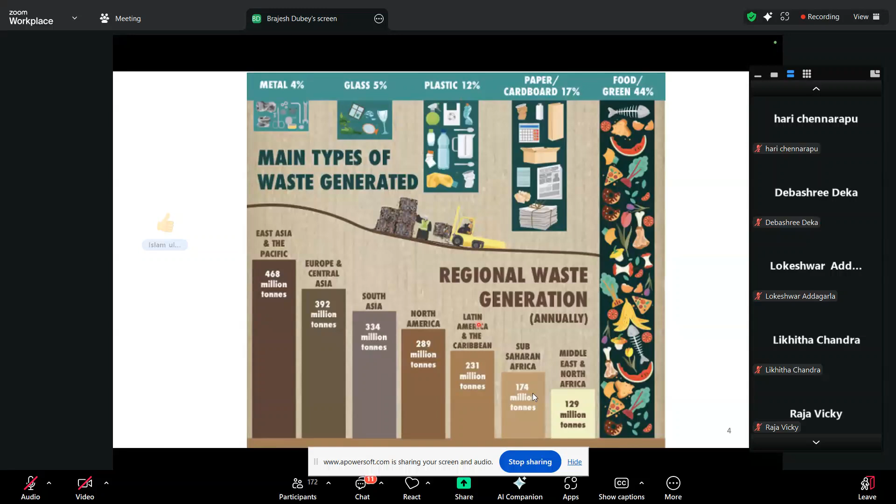What is happening today is, in many parts of the world, we are mixing the waste together. When we mix the waste, it's very difficult to do anything with it other than putting it in a sanitary landfill. Last year's report, which had slightly older data, is also suggesting that the world has to move beyond the waste era. This is the UNEP report on beyond an age of waste, turning rubbish into resource.

Projections show that we are doing lots of open dumping and burning of waste, mostly open burning, which is causing increased pollution. There's an urgent need where waste generation from economic growth has to shift towards zero waste and more circularity. Although we keep talking about circularity for several years, unfortunately this past year our circularity percentage has gone down - earlier it was around 9%, now we are down to around 7% globally.

So we need action. We are seeing lots of inaction in the global waste management area or resource management area, and that is impacting human health, economics, and environment. It can lead to almost $600 billion surpassing in cost for improper waste management by 2050. So we have to do better.

In terms of how we manage solid waste very simply, it could be a centralized approach or decentralized approach, and AI, IoT, ML and other things could be useful in both sectors. We generate the waste, store it somewhere, collect it, transfer and transport, process it, and dispose it. Centralized could mean a big plant - it all depends on economy of scale. For waste to energy and others, you need a certain size of plant, especially incineration plants.

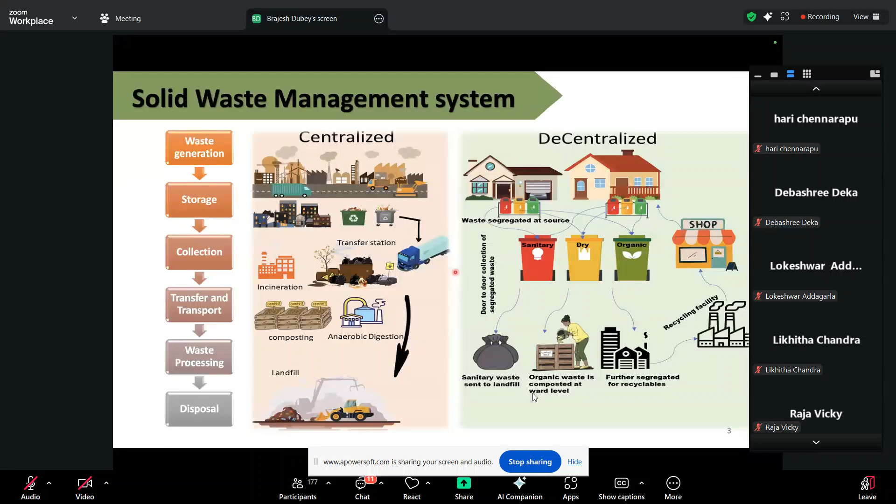The decentralized approach is similar - you can take a few wards or part of the city and have a compost plant there, or a biomethanation plant. Depending on the situation, it all has to work economically, and that's very, very important. If the economics doesn't work, things are problematic.

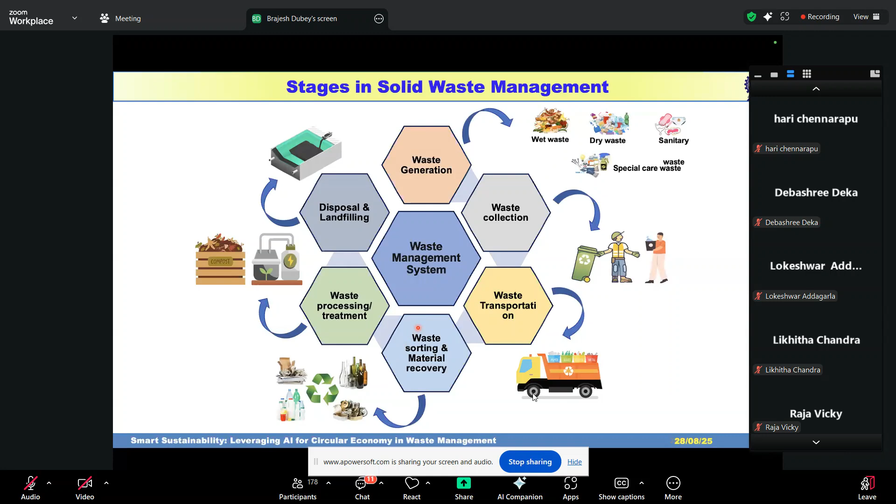As I said earlier, waste generation includes dry waste, sanitary pad waste, and special care waste, which has to be collected, transported, sorted, processed, treated, and disposed. So this is basically the big picture of the different stages in solid waste management. As I said earlier, if you really want effective waste disposal, segregation is the key.

Some of you may have seen this slide earlier as well. I wrote this piece almost 7 years ago, and unfortunately we are still doing very poorly in terms of segregation, not only in India but in many places in the world. So unless we do segregation, we'll look at how AI and IoT can help.

The other phrase in the title was circular economy. By this time most of us have some idea about it. Circular economy is nothing but trying to reuse the waste, trying not to produce waste, because waste is actually also a resource as long as you have the technology to make it a resource.

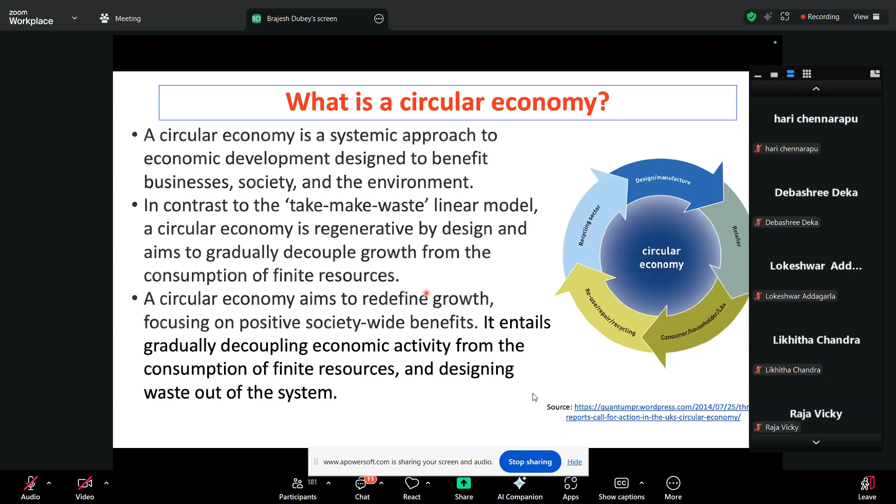Rather than a linear waste model, you try to design regenerative by design, decouple growth from the consumption of finite resources, and while doing that also look at how it positively affects society. At the end of the day, because we have finite resources, we have to make better use of them and try to design the waste out of the system.

As I said, circular economy—right now, only 9% of the world's economy is circular, which was the previous data. The latest data says it's down to 7%. The way we live, we need 1.8 Earths. Unfortunately, we have only one Earth.

Of course, we are trying to go to Mars, but the way we are living on this planet Earth, I don't think we deserve to go to Mars. If you disagree, we can debate that during the Q&A. But I don't think we really deserve to go to any other planet unless we fix the mess on this planet first.

We are using 80% more of the Earth's resources than it can give us. So circular economy says we should extend the life cycle of products through sharing, leasing, reusing, repairing, refurbishing, and recycling, and try to make better use of the resources available to us.

So how can digitalization and Industry 4.0 work in circular economy, and which are the tools? Leveraging artificial intelligence is one part of it, but there are other tools available too—AI and ML, Internet of Things. I'll explain a bit more in the next slide, since this webinar is attended by a variety of people. Then there's blockchain technology and smart manufacturing.

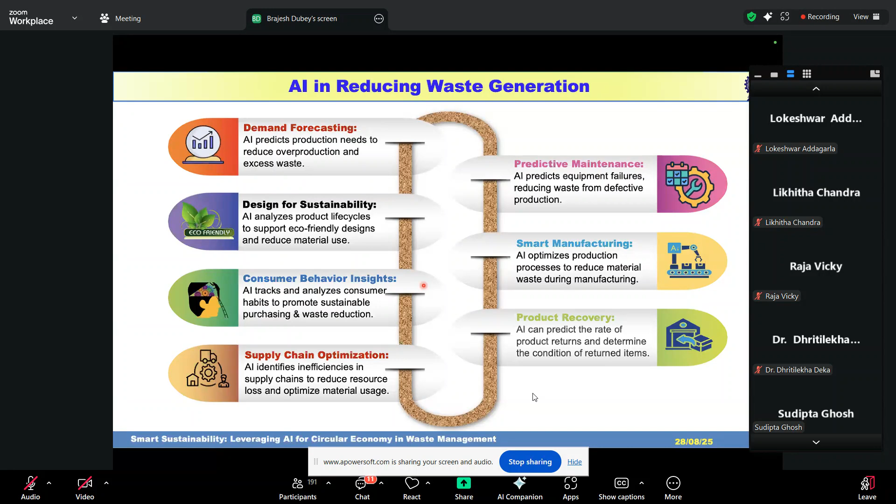In terms of predicting waste generation, it can give us the waste volume using demographic data, seasonal data, and behavioral data. As you can see, unless you have good data, the forecast will not be good. This helps allocate collection resources efficiently.

You can have smart waste bins, which is already used in many places in the world. Sensors in the bins tell you the status, which can help in terms of the collection network. It can analyze this data to schedule pickups only when the bins are near capacity - on demand collection.

You can have smart route optimization. You can use machine learning algorithms which look at historical data, traffic patterns, waste levels, to reduce fuel consumption, operational cost, as well as carbon emissions.

Real-time AI can adjust collection schedules based on traffic patterns, like Google Maps sometimes tells you to take an alternate route. It also considers weather forecasts and holidays, minimizing missed collections and optimizing fleet utilization. Those trucks are quite expensive, especially the well-equipped ones, so this helps a lot.

It can help in material sorting and material recovery stages as well. Deep learning models can classify material through image recognition, enhance processing by sorting hazardous versus recyclable items, and distinguish between different plastic polymers. We already talked about automated waste sorting - you can sort materials like plastic, metal, and paper using robotic arms equipped with AI.

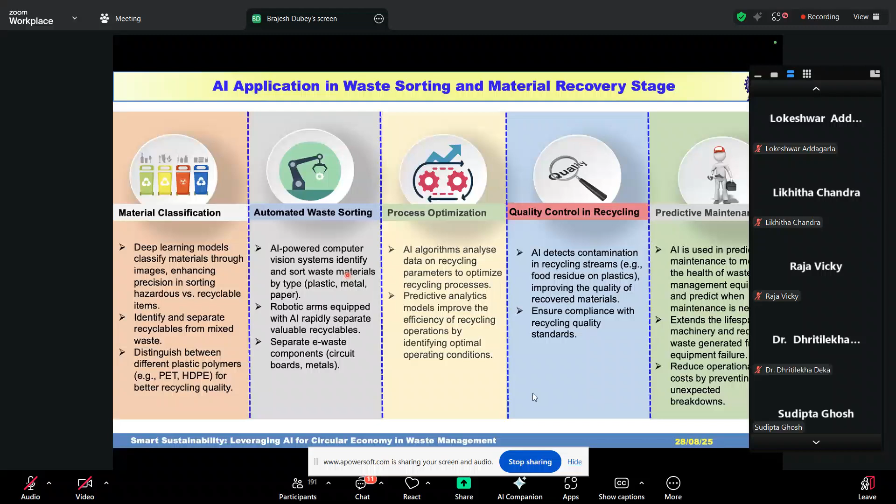AI is used in predictive maintenance as well, extending the lifespan and reducing the cost. So as you can see, these things can really help in achieving circularity.

If you look at some specific applications of AI tools in organic waste treatment options - throughout the world we want source segregation, predominantly wet and dry. Wet is essentially our organic waste. With organic waste, you can do anaerobic digestion, fermentation, composting, hydrothermal carbonization, pyrolysis, or gasification. So a variety of options could be there.

Organic waste typically makes up 40 to 60% in something like Indian conditions. There are different thermochemical and biochemical processes. What happens is we have inconsistent source segregation - inorganic waste leads to contamination, and if you have contamination, compost quality is hampered. Manual monitoring of organic waste is slow, and manual data collection is often incomplete and inaccurate.

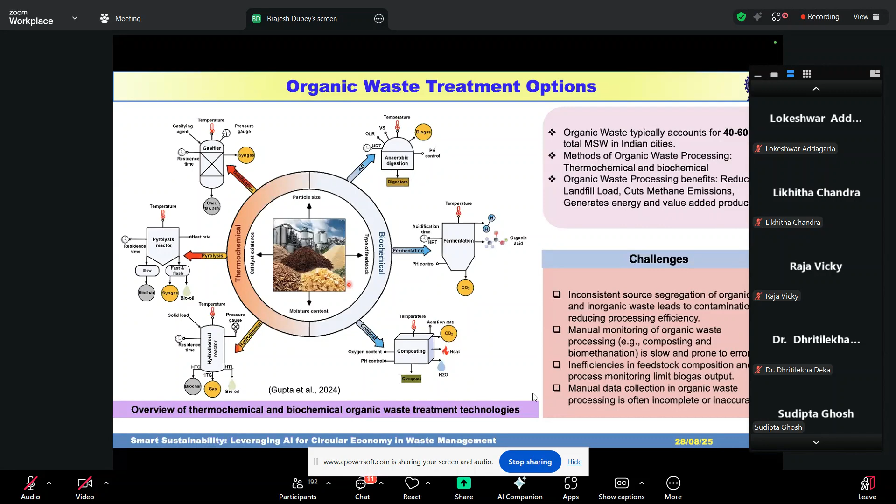So what we can do for organic waste is have smart waste classification and sorting. We can look at contamination in the organic waste, reduce it, and improve it - this will improve compost and biogas quality. We can also look at the composition as well.

If AI can analyze my organic waste composition, it can tell me whether I should go for composting or biogas. It can also tell me whether I should go for a pre-treatment step, and how much pre-treatment is required.

That will really help. Real-time feedback could be done to enhance the quality of the process, for real-time process monitoring of the organic waste decomposition process. IoT sensors could look at temperature, moisture, pH, and all that. You can even predict how much gas, oil, and char yield will be produced in terms of the thermochemical process, predicting biogas yield and process stability. If we design it properly, these tools could be helpful in making organic waste treatment more effective.

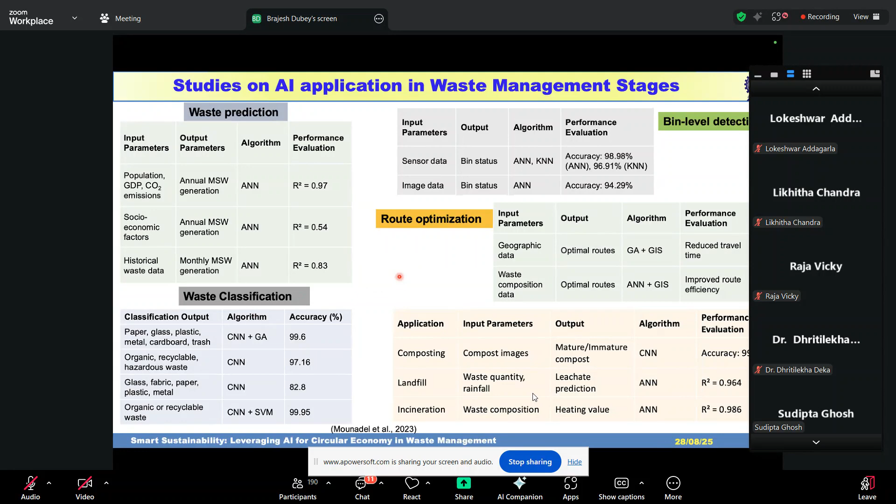People are already working on this. You can see some of these papers which I've cited here. This is a review paper that looked at a variety of papers on waste prediction, mostly using ANN, as well as route optimization, bin level detection, and waste classification. Applications have been demonstrated through some pilots and other projects, and there are plants that have already started using these tools.

For example, Barcelona has a smart waste management system. There are other places too, I just picked a few examples to illustrate this point, but there could be many examples out there. I've seen similar systems in the Netherlands and other Western European countries myself. They use sensors installed in waste bins that monitor the fill level and communicate with the waste collection truck, helping achieve better collection routes based on real-time data. In Seoul, South Korea, they have this.

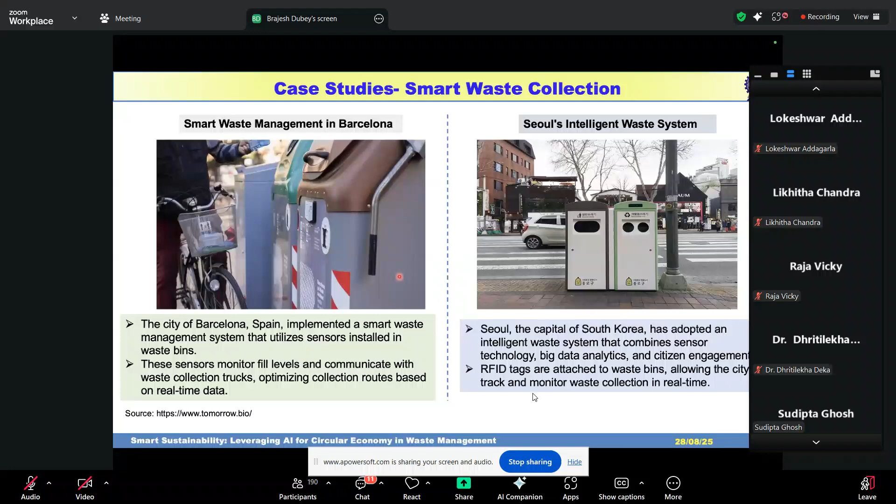Intelligent waste management system that combines sensor technology, big data analytics, as well as citizen engagement. RFID tags are attached to the waste bins, allowing the city to track and monitor waste collection in real time. Then there's a sorting case study happening in Virginia.

One recycling center in Virginia installed AMP technology - AMP's AI platform, AMP Neuron, which uses cameras to scan mixed waste and identify different materials. By installing that, they actually improved their recycled material recovery by 10%. So it's not just fancy technology, it has real application on the ground too. The neuron's deep learning capability allows for continuous improvement.

But one thing you need is at least wet and dry segregation. You need to have recyclables collected separately. Source segregation cannot be replaced - even with AI and all that, you will have to do source segregation, which is actually one of the bottlenecks in a country like India. But we have to do that. Only then will these things work.

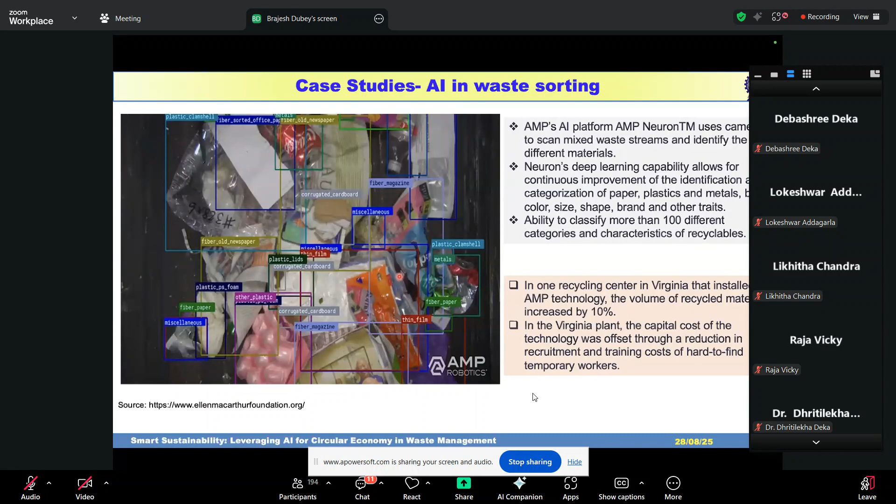So you can categorize for paper, plastic, metals, different colors, different sizes, different shapes, sometimes even brands - with the ability to classify more than 100 different categories. So that's the case study happening in Virginia.

Similarly, there's another one in Solon, Ohio, operated by AMP Robotics Corporation. They use AMP jet technologies with pneumatic ejectors, computer vision, and AI cameras that look at color, texture, and logos. Machine learning algorithms process over 150 billion objects. Annual capacity is 50,000 tons of waste, at 18 tons per hour, with a sorting efficiency of more than 90% recovery rate for targeted recyclables.

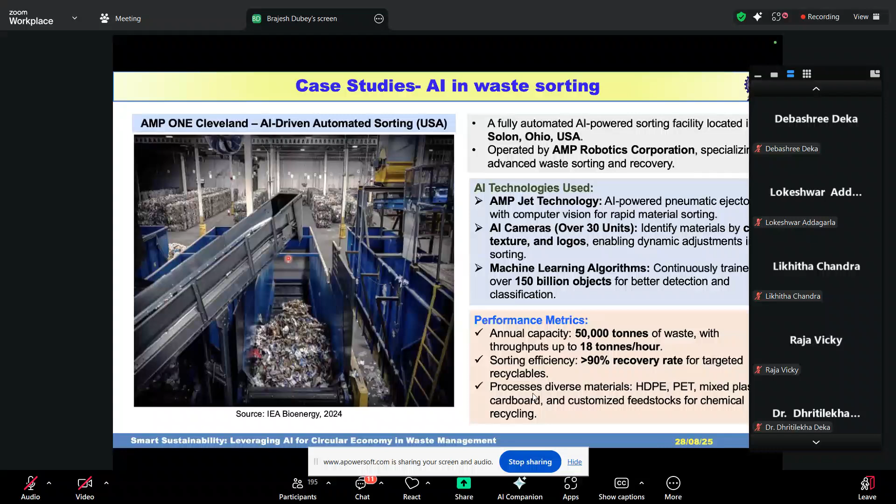It does help. Initially these systems are costly, of course, and the return on investment may be slightly longer, but if you think from a life cycle cost perspective - many times in industry we think only in short term costs, but if you think of life cycle cost and better resource efficiency, these things do help globally. Of course, these also need to be supported by some sort of incentives, I don't want to call them subsidies, for companies to come forward, because they are a bit costly to start with.

In Sweden, they have state of the art plastic sorting plants using NIR sensors, deep learning cameras, laser object detection, and digital processes. Here also they achieve a purity level of more than 90% for the mono-plastic fractions.

Sorting efficiency is up to 95%. So these things are being used, and they do help in terms of bringing circularity.

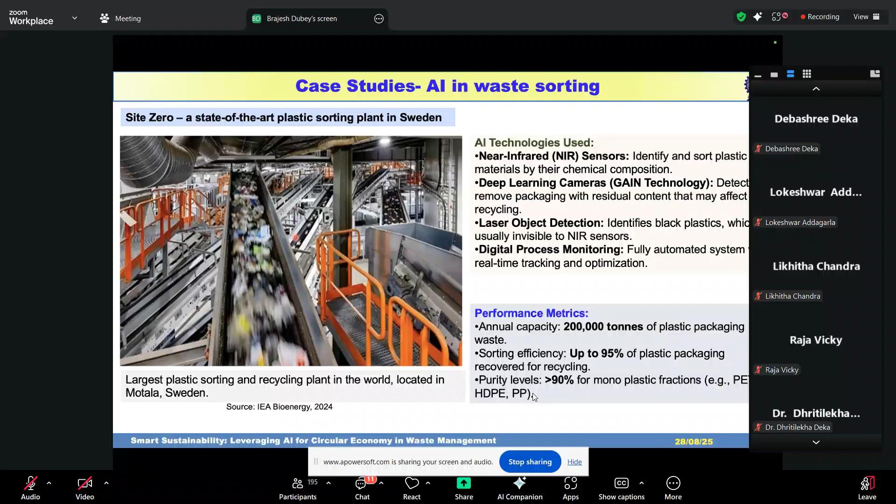For example, many cities in India have given people two bins for wet and dry waste, but the truck still does not have compartments. So if the truck does not have compartments, they mix it together in one truck. The separate truck doesn't come, so people lose the incentive to do source segregation at home. So inefficient waste segregation at source and poor waste processing facilities—those things have to be worked on.

So when we talk about all these AI and other tools, one thing I'd say is, think about it like making a comparison with a pizza—we all love pizza, most of us, especially since this is being hosted from Chicago, and that Chicago deep dish pizza I really enjoyed with Professor Reddy when I was there. So in terms of pizza, you look at it: it has your base, then cheese, then some toppings, and you add seasonings on top.

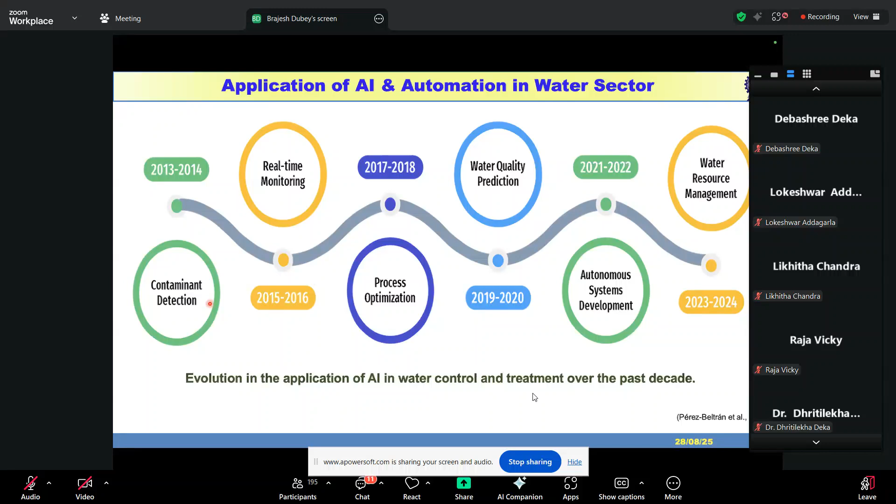In fact, even for flood protection, Singapore is using a smart water grid. Of course, Singapore is known for its advanced water management practices. Now they are using an AI powered smart water grid that utilizes sensors and AI algorithms to monitor real time water quality. Singapore takes wastewater, treats it, and the treated wastewater is taken to the drinking water plant and used as NEWater. So they have been doing circularity in water for many years now. The system promptly identifies any anomaly or potential contamination so you can intervene, enabling rapid response to water quality issues and ensuring safe drinking water is supplied.

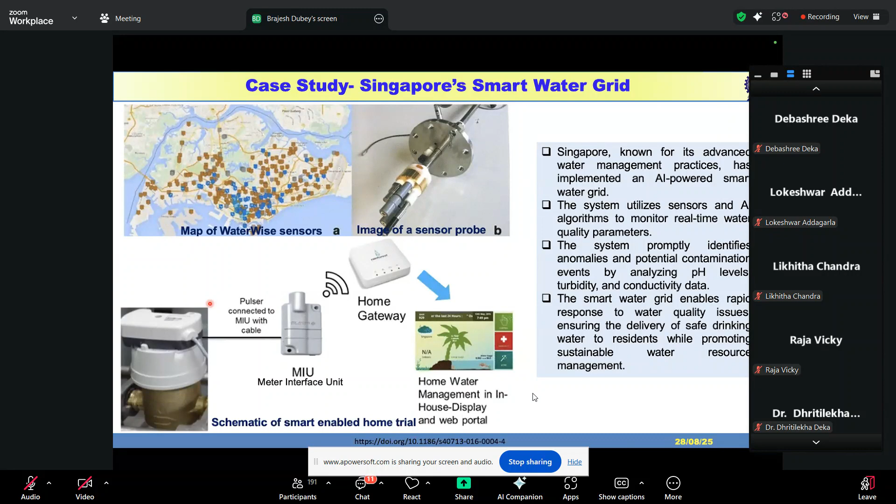And if you can do that, trust builds between the consumer and the supplier, so we don't need all those RO units that we install at home. All these RO units we install at home are, as an environmental engineer, kind of a waste. Although I have an RO in my home at IIT Kharagpur campus, I feel like it's a waste because of the amount of water we waste and all that.

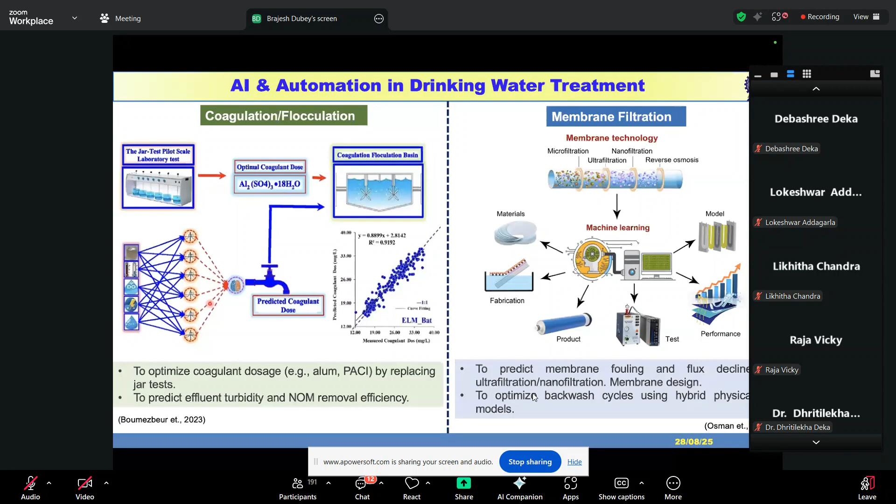In terms of optimized coagulant dose, replacing jar tests, turbidity, and natural organic matter removal efficiency, you can use machine learning for membrane fouling as well. So these things are being used in other sectors of environmental engineering too. In fact, predicting heavy metal removal, modeling equilibrium adsorption processes, disinfection processes—all these things are being done.

So when we talk about this AI, what are the challenges? We talked about the challenges for waste management in terms of data, but in general, if you talk about civil engineering applications, AI could be used in other civil engineering applications as well. There's a need for civil engineers to be proficient in data science and AI concepts, so the way we teach civil engineers also needs to actually look at this.

We have to talk about high initial investment, cost of software and hardware. But when I talk about this civil engineering curriculum, I don't want our basic courses to go away, because those basic courses are needed—that's the pizza example again. All those basic courses, your electives, and then you can have your AI courses there. Because unless you are a good civil engineer, just having knowledge of AI is not going to help you.

But in today's world, you have to learn all this stuff as well, because this is how the entire global industry is moving. So we should be aware as civil engineers about the different technologies out there and how to use them in civil engineering applications. And we can use it in civil engineering applications when we know civil engineering—we have to really be good at basic civil engineering as well.

So data quality matters—AI models are only as good as the data they are trained on. Then of course there's data privacy and cybersecurity risk. There is always cultural resistance, overcoming traditional practice within the industry. There's regulatory liability—who is responsible if the AI-designed structure falls? And then of course the skill gap which I talked to you about.

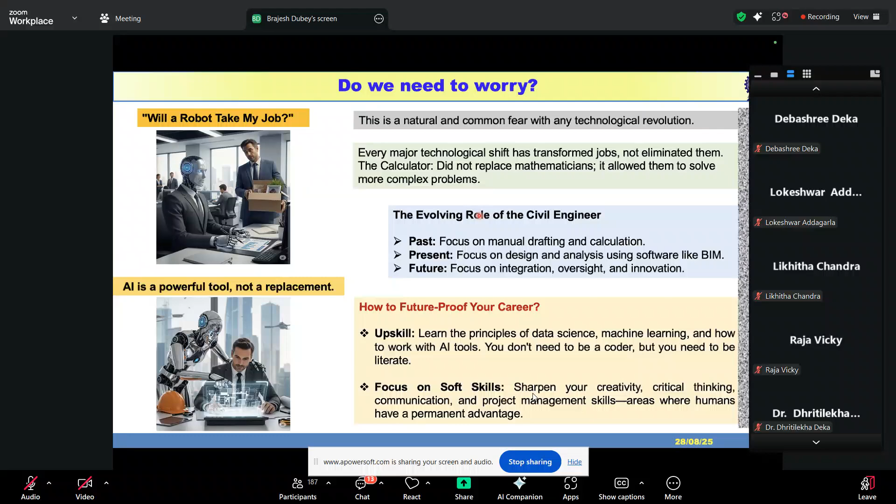So there is always fear when we have a technological revolution. But every technological shift has transformed jobs, not eliminated them. The calculator did not replace mathematicians—it allowed them to solve more complex problems. Similarly, AI models have allowed us to do better things. We have to upskill, learn the principles of data science, machine learning, and how to work with AI tools. You don't need to be a coder, but you have to be literate in these subject areas. Focus on soft skills as well—critical thinking, communication—where humans have a permanent advantage. I don't think AI can replace that.

So that's the big picture of what I wanted to cover very quickly in the next two or three slides. I will just talk about what we are doing right now.

We are trying to use lots of circular economy concepts in our lab. We work a lot with the organic fraction of municipal solid waste for fuel applications, energy storage applications, and try to produce bioplastics to bring circularity, even hydrogen production. We have a project where we use food waste along with sewage sludge for biohydrogen production. We also have an Indo-Sweden project where we try to learn from each other in terms of bringing circularity in municipal solid waste and all that.

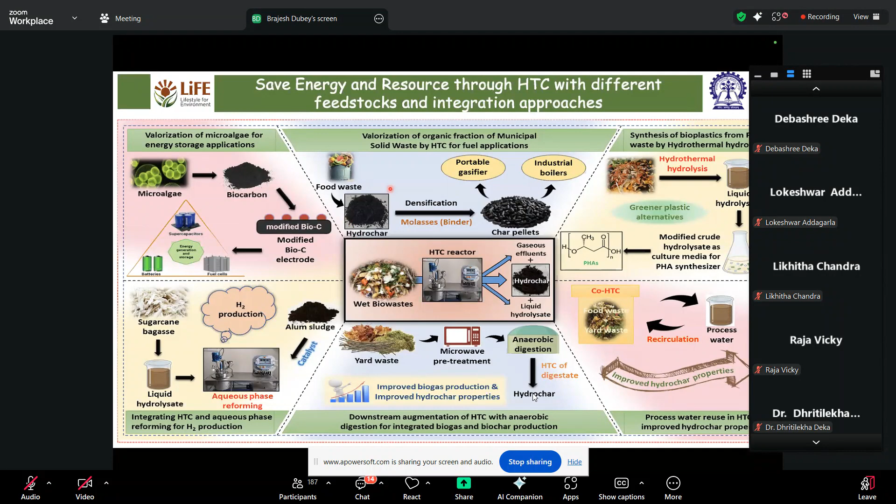Recently, we have a couple of students trying to work on how to use AI and other tools for better life cycle assessment processes and better waste management. Tomorrow I have to defend a proposal in front of a panel. I hope we get that project, where we are trying to use AI, IoT, and other sensors and tools for better plastic waste management, especially in hilly areas of India, both in the Jammu area and the Sikkim area. These are the two areas we have identified.

So we are working with a variety of organic waste. If you have heard me before, you have seen that.

As Professor Reddy mentioned in the introduction, I have developed several online courses which are available on YouTube. It keeps being offered through the Swayam NPTEL platform. There's a course on sustainable engineering concepts and life cycle assessment. I'm also trying to develop a course on circular engineering. Very soon you will have a course on introduction to circular engineering, because I feel that unless engineers start thinking in a circular way, you will never have a circular economy.

So, waste management, then plastic waste. We have a course on e-waste and a basic course on environmental engineering as well.

I also work with several startups, providing voluntary service to help fine-tune their work. Of course, we sign non-disclosure agreements and help them do better in terms of their business prospects. So you can always contact me.